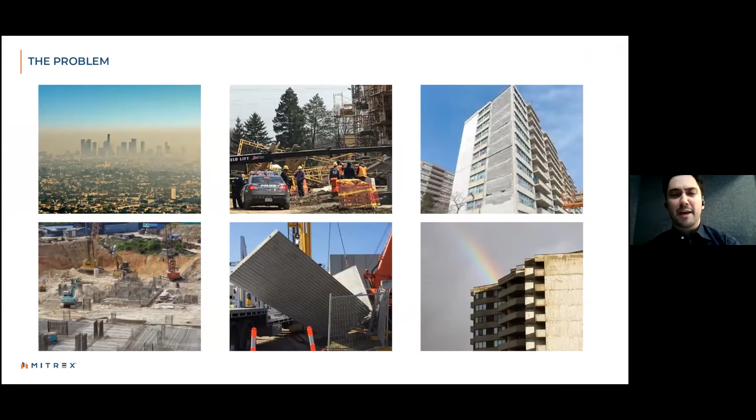We believe that rapid, low-cost, sustainable technology is not only viable, but it's the path forward for a brighter future for humanity. I think we're all familiar with some of the pain points associated with construction. High-rise buildings significantly contribute to energy consumption. Constructing them can be expensive and complicated, particularly when heavy machinery is involved, and building degradation can be an eyesore for neighborhoods. And looking at the bigger picture, humanity is overly dependent on fossil fuels.

Now, this isn't a North American problem or a European problem or an Asian problem. This is humanity's problem, and we all have to find a way to solve it, because fossil fuels are not only rapidly accelerating climate change, but they simply won't be around forever. Renewable energy has been around for a while, but its adoption has been hampered by three things: poor aesthetics, high price, and slow production. Mitrex solves all of these problems, and we do it through integration.

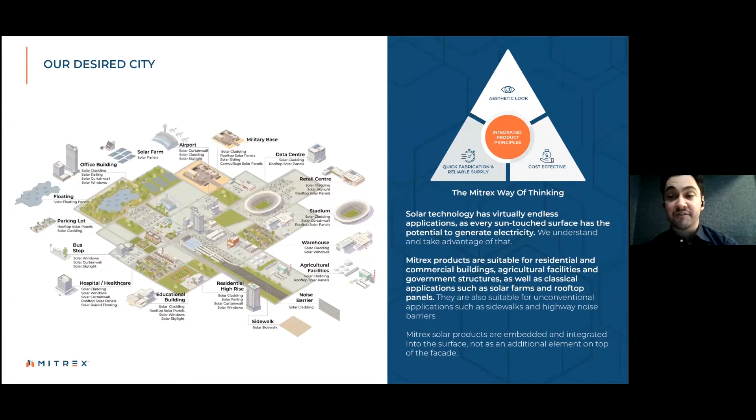So solar buildings can and should be beautiful. Construction can and should be quick and easy, and a building owner shouldn't have to blow their budget to have a sustainable building. Now, looking at our technology, it has 3 layers. So starting with the Solarail, a solar cell is sandwiched in between 2 layers of customizable tempered glass.

And for our cladding, a solar cell is sandwiched in between an aluminum honeycomb plate and a layer of completely customizable, UV stable, anti-soiling, fade resistant, and anti-reflective tempered glass. This design allows the cladding to be lightweight and incredibly strong, and it allows it to function as the exterior facade of the building as well as generating solar energy. So it is both the exterior facade and a solar panel at the same time. And we cover all 4 vertical walls.

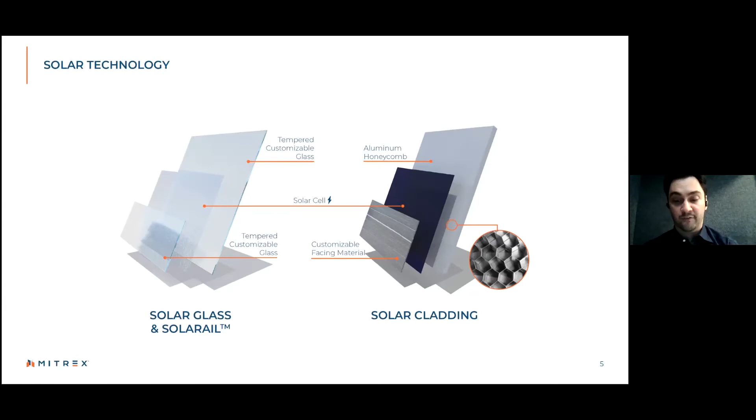Now, this might be the slide that you've all been waiting for, when you're wondering what I'm talking about here and what our cladding looks like. As I mentioned, our cladding is fully customizable, and we mean fully customizable. So we can adhere to any color pattern design, including brand colors and logos, giving clients and architects total flexibility.

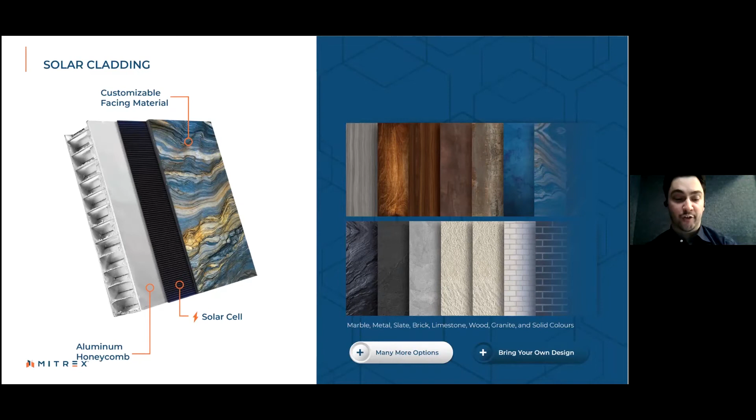So in the past, architects have had to get really creative with how they integrate solar panels into a building design, as I'm sure a lot of you are aware, because solar panels might not be the best looking material. Well, we've completely eliminated this hurdle. So our cladding works around the building design, not the other way around. And then as you see here, our Solarail comes, like I said, in a variety of options in terms of color and transparency.

Now, I'm no architect myself, but what I can tell you from this slide is that both our Solarail and our cladding can integrate into a building in a variety of ways, with all wiring being completely invisible. So depending on a building's design and needs, we work with the architect or the engineer to come up with different ways, including Z-clips or anchor plates or interlocking channels for the cladding to integrate into the design. And our cladding is a ventilated rain screen system.

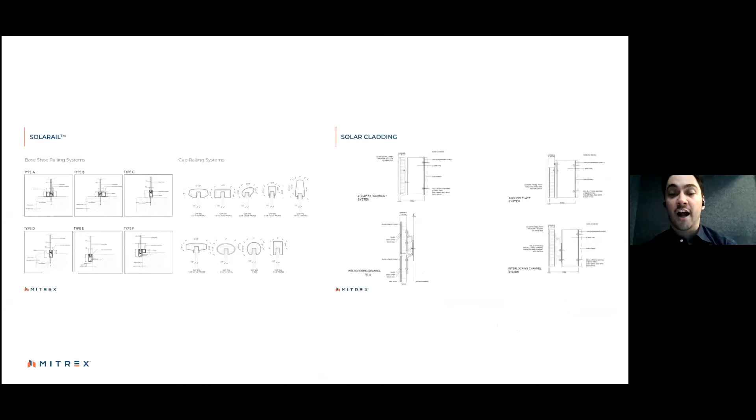Now, like I mentioned, one of the best parts about Mitrex is that we seamlessly integrate into the building. So if somebody were to walk by a Mitrex building, they would have no idea that it's powering itself. All wiring is invisible, and we hardly take up any extra room in the building, typically sharing the same room as the utility.

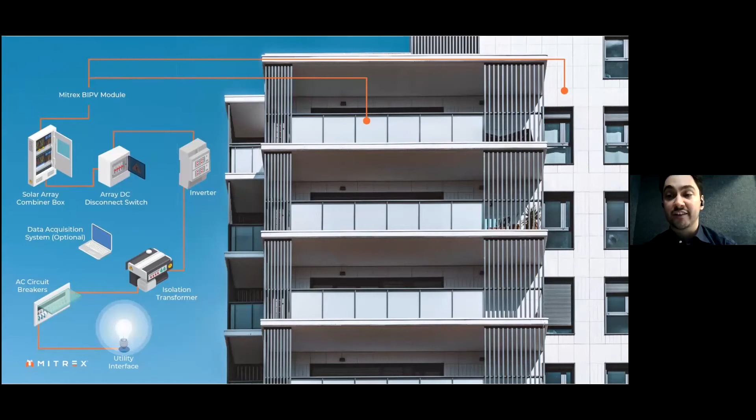Now, in terms of LEED, Mitrex is able to help both new builds and retrofits get high levels of LEED certification. So our ventilated rain screen cladding system can achieve an R value of 25 or higher, depending on the owner's needs, improving both the thermal and acoustic comfort of the occupants inside. And our solar BIPV materials generate significant on-site energy that's renewable, as well as being completely recyclable.

Now, when I talk about integration, our services are included in that integration. So from the moment a client sends us their plans and drawings, we can tell them exactly how much electricity a building will generate based on its location, its elevations, the color of cladding, future builds in the area, other shading in the area, etc.

And we handle everything from the Blueskin out as a company. So the Blueskin, the insulation, which we do mineral insulation as well, I should add, the wiring, the cladding, the caulking, the setup of the system, we handle everything from A to Z. And because our system and services are comprehensive, clients only deal with us.

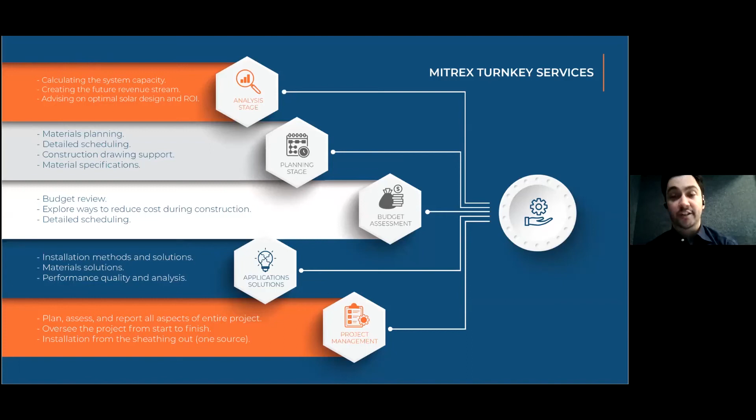Now, in terms of purchase options, we have two, and each has their own philosophy, with our goal being the accelerated adoption of solar, regardless of an end user's budget. Both include our turnkey service from the moment we get drawings until the cladding is completed.

So looking at the Mitrex Power Agreement option first, or MPA, what we've done here is we found a way to allow building owners to introduce sustainable energy without having to blow their budget on the building. So we will sell the system to the owner at a below market price. And what I mean by below market is it will cost less than them cladding the building in traditional materials

like precast or ACM. And then in turn, Mitrex owns the electricity being generated by the building over a 30-year contract, selling it back to the owner again at a below market price. So always at a lower cost than the utility.

Now, a building owner might be thinking to themselves, well, that's great, but we'd much rather own the electricity being produced ourselves, in which case we would proceed with our direct purchase agreement. They would buy the system, spend a little bit more to own all of the electricity being generated, but then in turn, they would realize a higher ROI and a shorter payback period of the system.

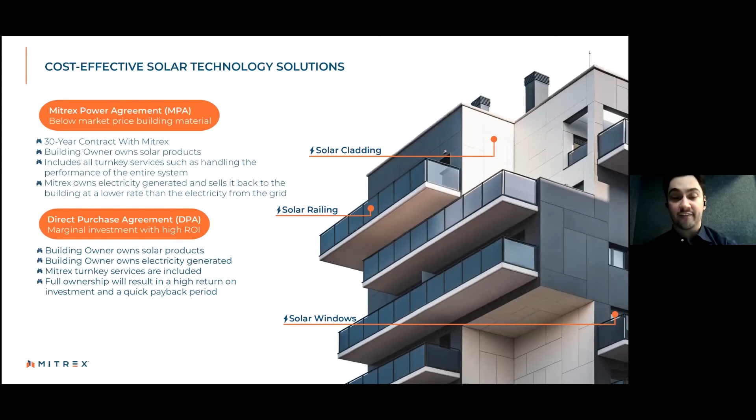Just looking at a brief case analysis for one of our projects quickly first. So like I said, our MPA option has an instant payback period. So looking at 100,000 square feet of cladding in Ontario, priced at approximately $65 per square foot for traditional materials like ACM or precast, our MPA option is actually $20 per square foot cheaper than the average market price.

So an owner would save $2 million on that project for 100,000 square feet of cladding going with the MPA option. And then they get all of the benefits of the rain screen system and the on-site renewable energy. Like I mentioned, for the DPA, it is a bit of a higher investment up front. So an additional $15 per square foot or $1.5 million in total. But then in turn, they would realize an ROI of 320% with a payback period of 9 years.

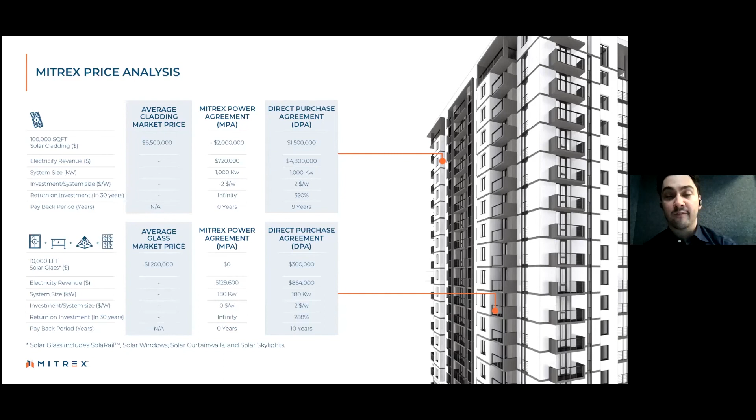Now, either option is going to convert the building facade from a sunk cost into a passive revenue generator, while also offering the great ROI, the beautiful building design, and Mitrex full turnkey service.

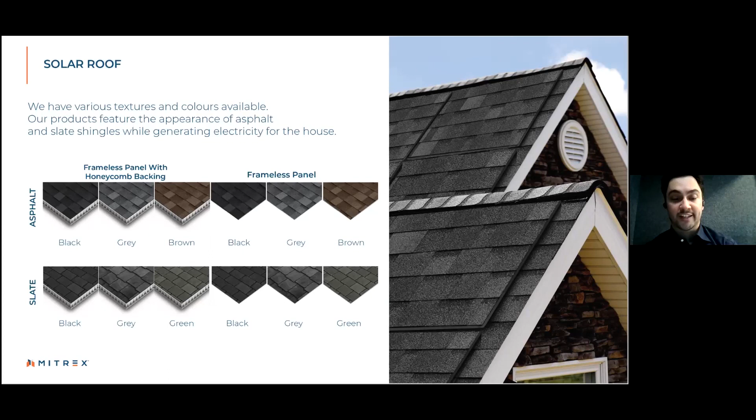The output of these panels is approximately 400 watts per panel. And like I said, they function the exact same way as standard, so any properly licensed installer can install them. These are just some of the options that we are currently or soon to be offering. As I mentioned, we're constantly investing in R&D. We're always looking to introduce new products to the market that can contribute to greener cities. If I haven't mentioned it already, we're a proudly Canadian company. All of our products are manufactured in-house at our Toronto headquarters.